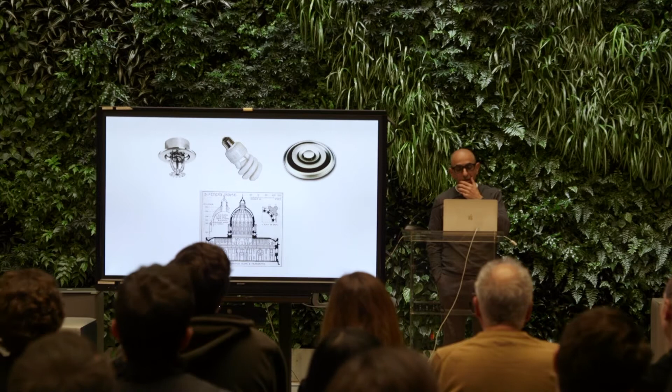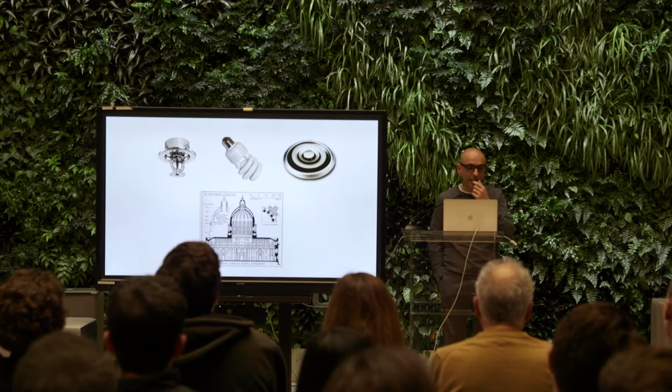And yet all we have to do when we design is the reflected ceiling plan. They've done a pretty organized job here, but I'm saying that those of you who practice can appreciate that for all of our education, we're never actually confronted with the reflected ceiling plan. It seems like an absurd thing to do in school, and yet we've constantly been the victims of this fifth elevation, and we're screwed by it daily.

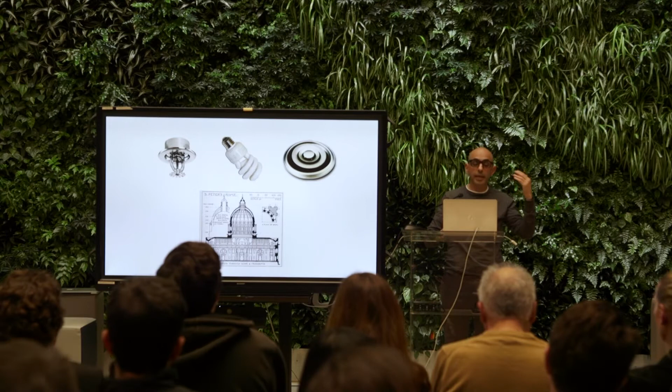So that has become a 10-year project for us, and the first of which, ironically, is the project that is the most published and most copied in the world. It's very funny because it came out right before the crisis in 2008, and it was dismantled within a year or two.

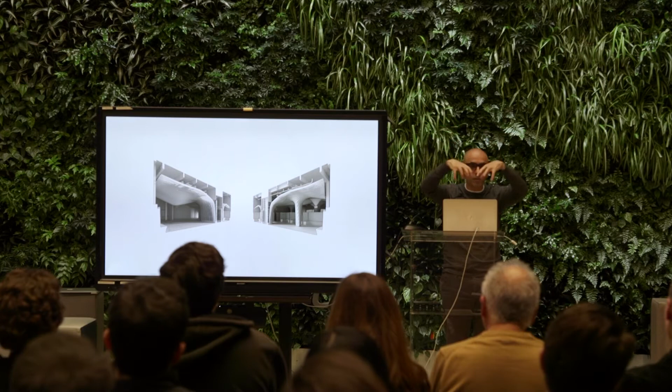But it was a restaurant designed underneath a new developer building. And what happens in these developer buildings is that all of the mechanical systems of the units above get placed in the space below, without the ability to determine and control it. So we decided, okay, we're going to work with this.

We're going to evacuate the ground from clutter so that you can make 2-seaters, 4-seaters, 6-seaters, whatever it may be, but we will delay the ceiling for as long as we can because it's actively under construction, and lay out a rule for it—only a rule—and that is that we're going to build a series of slats about 9 inches apart, 9 inches deep, and the only rule is that they come together around the columns.

Otherwise it wouldn't look right because you'd see too much of the column. It would become a kind of proscenium on one angle, giving the illusion of smoothness, but completely porous on the other, where you see the backstage of what's happening. In this case, you see the bottles of the wine room and so forth, but essentially the lighting, the mechanical system, the sprinklers are all in full view in those views, and the bulges are in a way an approximation of that shrink wrap as we brought it together in the final instance.

The contractors on this job were the contractors in Boston that do all of the Dunkin' Donuts, and so their ability to fabricate this was almost nil. So this was the first project that we ourselves project managed for the first time, taking it through construction.

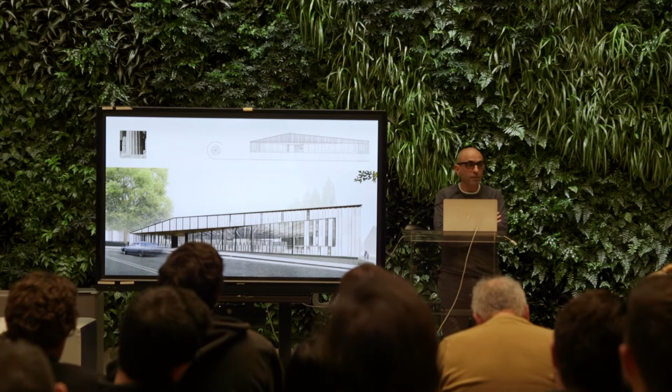There's also the ghost of contextualism, the ghost of history, the omnipresence of a kind of liberal social state with deep conservative proclivities when it comes to architecture. For us, the question was how to play with that in such a way that it establishes a kind of strategy of the Trojan horse, working in two ways at the same time.

As we go to larger buildings, the prospect that representation can address the battleground of construction becomes even more urgent.

In the Daniels Building in Toronto, we were to build the extension of the architecture school in the center of Spadina Crescent, with all the small rooms in the existing building and the large studio to the north, with a new facade for the first time - embedding all the additions into the landscape with adjoining urban spaces that activate the circle and make sure the tower is not blocked by the addition, with only one northern window bringing ambient light to the studio spaces.

As a building, it is the most compact and dumb building you can imagine - just a square plugged in like a keystone into the building. But as a project, it is a robust piece of landscape urbanism in the way that it negotiates the territory.

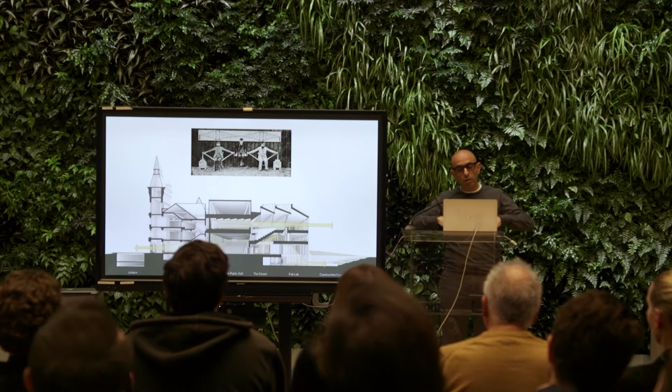The studio space that sits underneath that roof is the reason for this story. The building, which is quite economical by any measure, is a concrete building that rides up 3 stories and sectionally gets aligned at different moments with the streets.

As the streets come down into the Fab Lab in the basement, streets go through it, connecting University of Toronto to the Kensington neighborhood to the south where there's the sun, and then the studio space is this space aloft. There are only 2 columns on the top floor, and they are the cores. Essentially, almost operating like the Firth of Forth Bridge, by cantilevering with a backspan on 2 sides, you're able to get a columnless hall up there for the flexibilities that a studio space may require.

And of course, we'd imagine the kind of folded roofs that Candela may have done as an extension of this concrete logic.

The elevation, in a way, is a register of the way in which essentially the structure, the daylighting, and the hydrology would all come together down these sideburns, these seams that bring the water back into the landscape and irrigate the site. So the project's investment really was this moment.

You're building up to this moment. And these skylights, by the way, are not merely lighting this room. They're all coming all the way down into the central hall, which is a dark space at the core of the building. So it is the idea of the building.

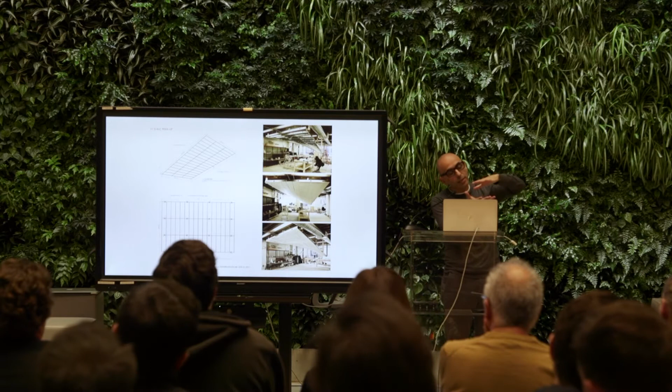Let's build it in the basement. Our basement is large enough to build one of these flanks. We did a little bit of research and we realized that there are actually gypsum board products out there, this has nothing to do with our invention, that are radiant panels. As such, you can get the heating from the concrete in the ground, but the cooling in the radiant panel overhead. And so the human body is between a kind of ice cream sandwich where heating and cooling is done in different seasons in between.

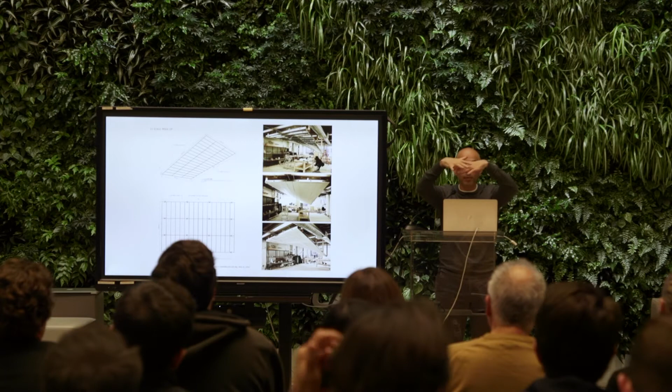And then in order to make it affordable, we went with a kind of low resolution solution. Abandon the concrete, despite the ethic of the building, go with a truss that will then essentially get the ceiling, a smarter ceiling, which is basically rooted in the functions of its mechanical system, and see what it does to the pricing.

And so this led to about an $800,000 reduction in that price. And this very thing started construction about 2 months later. And so the dumbness of the solution also came down to the ability to establish this reciprocity between the representational act and the mock-up and its deployment on site, the plastering, the painting, as it were, and its eventual completion. For those of you who have visited it, you may agree with me.

And for those of you who haven't, I think it's an important lesson for us. If the majority of our projects require an ethic of craft, this building, which for me or for my money is a great building, is terribly built. It's badly crafted, and I would not make a case for it. But the partie is so strong, it still holds the building. It's a kind of robust idea.

And so there are many aspects of it that I'm not going to be speaking about that have to do with its planning that are quite solid. And it's resilient in the sense that people can make changes to it, but it is a very strong thing.

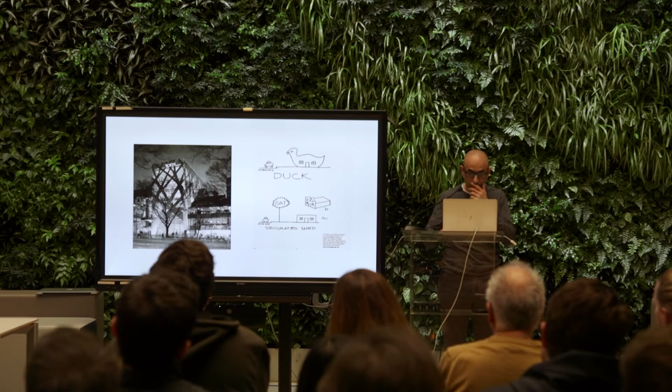So before we started, we knew the answer, and we were ruthless about it. This isn't our project - this is us being teachers, presumptuous as that is, correcting Ito's work. We knew before we started that our building is part of the natural landscape of Beirut, not its architectural campus. So if these are the buildings of the AUB, this is a huge bosque of trees, and that is the first building that is embedded in that bosque.

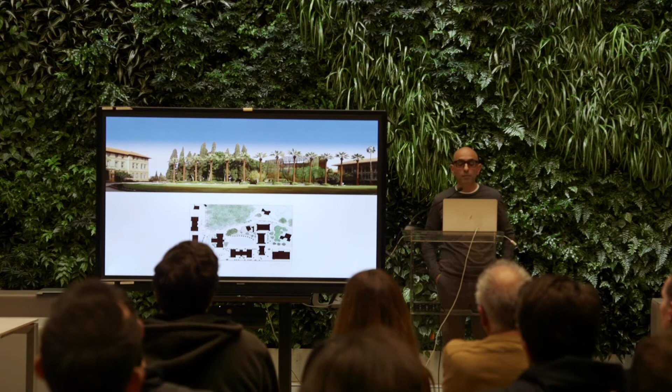There was an existing building there. So before we started the design, we knew it would look something like this - that behind the row of palms, the cedars, and the ficus lies a building that is the result of a system that spatializes this logic. So we had to find that logic.

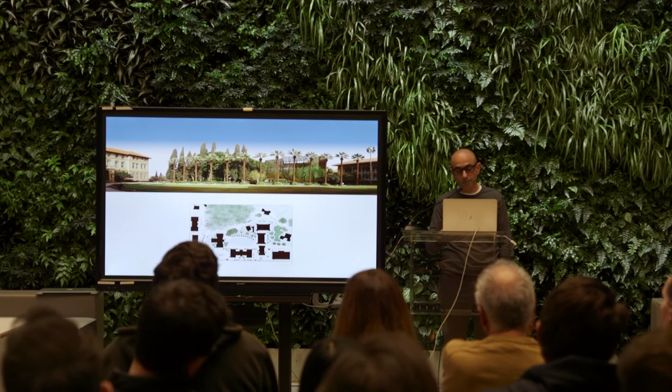And we start with that logic with a very simple observation, that a triangle and a hexagon have an organic relationship with each other - essentially, the hexagon is a truncated triangle. With that, you can make a column, I suppose you can make a pilotis, you can transfer loads from one axis to another at midspan somewhere, and you can make a wall out of it. In other words, it's replete with the possibilities of a lexicon that can bring an ordered disorder into some kind of confluence as you aggregate plans on top of each other which are not non-abiding in relationship to each other.

We also know that gravity is such that it will make weight at the bottom such that the poché can make space, and we know that if any transfers happen, they happen above that, and obviously the loads are always lighter at the top of the building than at the bottom.

So how we begin to manifest that produces the possibilities of a building that in other terms could be seen as a Dom-ino frame. And now this is another logic where the distortions come out of an intervention into a dumb frame. Here, the transfer beam over public spaces, or the way in which the backspan of a cantilever may be fashioned into an auditorium with a sloped floor, or alternatively how the building just gets lighter columns as it goes to the top.

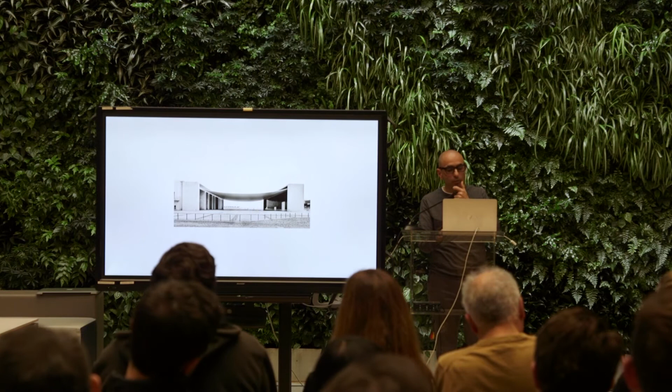As we move into the last chapter, it's no secret that what drives us in great part is not what we do per se, but the cultural project to which we are participant. When we look at Siza's Expo, I can't but imagine how that structural system speaks to what Kahn was thinking in how he interpreted the collusion between a bowstring truss and the idea of a theater becoming one, or how that structure may become optimized by Gaudi with hanging weights and chains turned upside down, and how Axel Kilian would take that and make it an instrument for simulation in the way we work today.

For me, these are at once operating on many levels of performance, because these are operating at the height of performance in the strict structural sense. This, by the way, is the crypt underneath the Escorial. It appears as a vault, but it is not — it is an absolutely flat ceiling. Instead of having a keystone in the center, all of the stones are angled such that they're keystones, and all of the pressure is in those corners.

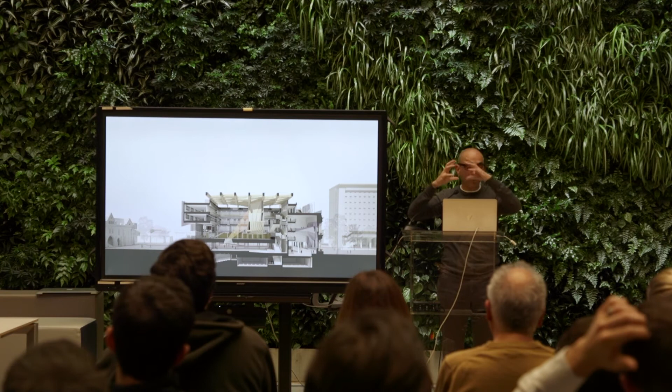The Melbourne School of Design is interesting because it wanted to compete with RMIT as a design school, but it never had studios. It wanted a new building with design studios. Within a month of programming, we realized they didn't have the money for dedicated studio desk space, so immediately it became a hot-desking building. The only thing they would give us were three visiting critics who could be housed in a totemic location that could become the studio spaces, with everything else as hot desks around it. So the parti of the building was determined almost within a month, and rather unexceptional.

But in imagining a space like that, we also did a bit of work in history, conjuring an inexact relationship between the Tempietto, Kahn's Yale Center for British Art, and Gehry's building in Berlin. In the Tempietto, you have a figure within a monastery context that is indifferent to that figure — a folly, an idealized object that in its own way relates to the geography over which it overlooks. But the Tempietto is indifferent to its context, and that's what makes it exceptional.

It is incarcerated in a court that you can only see through the gate. In Kahn, the figure held within the courtyard is an extension of the configuration of the concrete post-and-lintel system, exposed in the painting gallery, which takes essentially a fire stair — rather unexceptional as a program — and monumentalizes it into this totemic object that, through its silence and ellipsis, becomes something quite important.

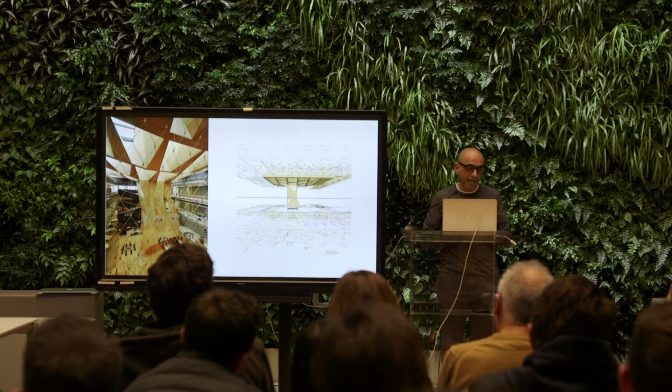And on the other hand, it's a representational system because you're actually taking the veneers of those very coffers and bringing them down the sides, shifting it to one edge so you have access to it, a kind of contrapposto position, and mapping

almost an inverted tectonic, the exact opposite of a classical palazzo, where the rustication is at the bottom. Here the rustication is at the top, with a kind of entasis that heaves down as the large members of this, the coffering, the massive elements above are inhabitable in the structural space at the very top of the roof, and then get suspended down in one studio space, its descent all the way to the lower spaces.

As you go down, you begin to see the thinness of those veneers, not only in their perforation for acoustic reasons, but also the baffle systems that give an open space of a conference area, an almost acoustic enclosure with all of its sprinkler systems interdispersed in between.

This metamorphic condition operates, if you like, at a kind of architectural level, an autonomous level. But in a strange way, the hot desks that you see all around here have become so successful that the designers in the building, it's the Melbourne School of Design, are upset because the entire campus is using it, and they don't have their hot desks anymore.

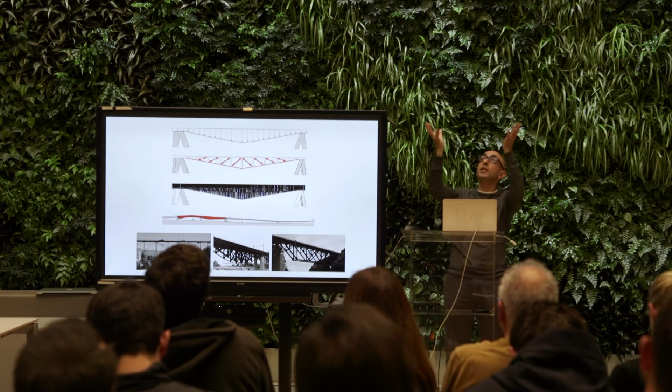And so for the bridge in Melbourne, which is a kind of second collaboration with John Wardle, we had to do another ceiling project. In this case, because the pedestrian bridge that connects to the tennis open is only used two weeks a year, the building, the structure, is all about its presence in the park, because that's the location in which it's seen.

So we were wondering what it would mean to use rebar, and by cross-laminating it on the longitudinal and perpendicular axis, this would become the means by which it would not only wrap it, but create the maximum moment at the deepest point of its reflected ceiling plan, while navigating this delicate terrain between having to perform structurally underneath, but also become railings and, of course, lamps for the top that are in dialogue with the skyline beyond.

So this idea of developing a representational system that is in sync with its structural system is, in my mind, what I call a kind of catalytic idea. For those of you who know me, you also know that I actually failed all my structural exams, so I'm the last person to be speaking about this, but it's also the thing that I've spent most of my life focused on.

I've always been, in a way, mystified by our natural acceptance of typological orders. We all know what vector active systems are, form active systems, and surface active, and yet we rarely come to confront them as conventions that can be overcome.